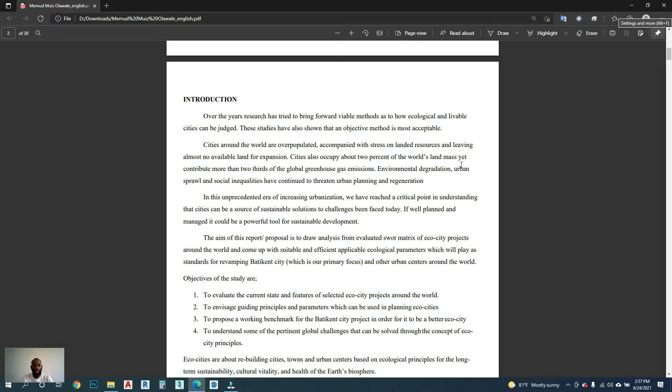The objectives of this study are: to evaluate the current state and features of selected eco-city projects around the world; to envisage guiding principles and parameters which can be used in planning eco-cities; to propose a working benchmark for the Batikent city project in order for it to be a better eco-city; and to understand some of the pertinent global challenges that can be solved through the concept of eco-city principles.

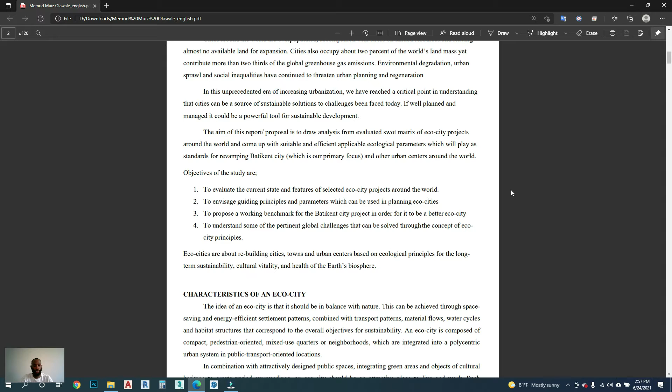Eco-cities are about rebuilding cities, towns, and urban centers based on ecological principles for long-term sustainability, cultural vitality, and health of the Earth's biosphere.

Characteristics of an eco-city: the idea is that it should be in balance with nature. This can be achieved through space-saving, energy-efficient settlement combined with transport patterns, material flows, water cycles, and habitat structures that correspond to the overall objective of sustainability.

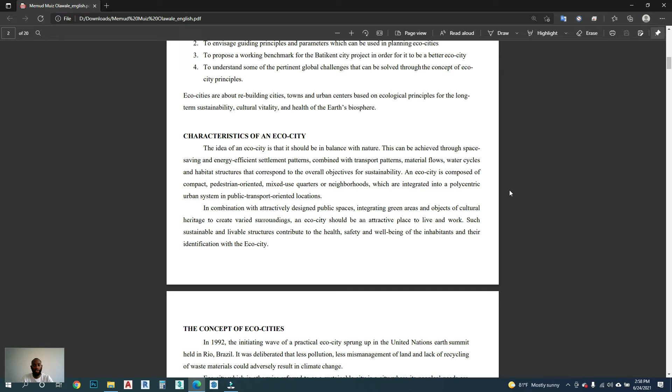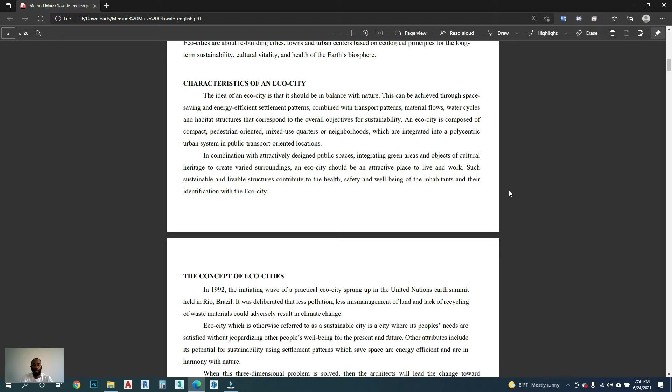In combination with attractively designed public space, integrating green areas and objects of cultural heritage to create varied surroundings, an eco-city should be an attractive place to live and work. Such sustainable and livable structure contributes to the health, safety, and well-being of the inhabitants and their identification with the eco-city.

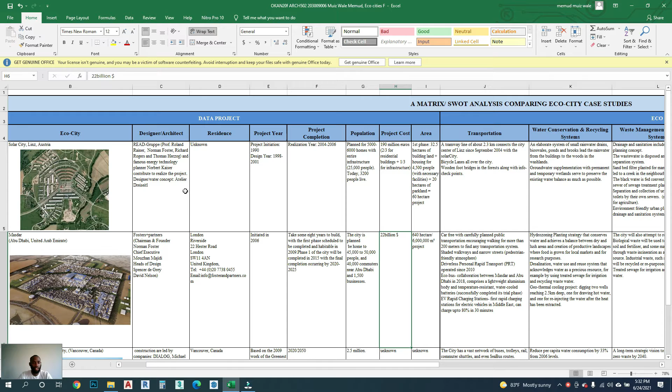This is the matrix and SWOT analysis table. The first case study is Solar City in Linz, Austria, designed by Professor Roland Rainer, Norman Foster, Richard Rogers, and Thomas Herzog. The residence count is unknown. It was initiated in 1990 and completed between 2004 and 2006, planned to cater for 25,000 people, with a project cost of 190 million euros.

The area of this city is 32.5 hectares of building land plus housing for 4,500 people with necessary facilities, and 20 hectares of parkland, equating to 60 hectares of land for the project. For transportation, a tramway line of about 2.3 kilometers has connected the city center of Linz with Solar City since September 2004. There are bicycle lanes all over the city, wooden bridges in the forest, along with information checkpoints.

The water conservation: an elaborate system of small rainwater drains, bioswales, ponds, and brooks lead the rainwater from the building to the woods in the washland. The drainage and sanitation are included in the overall planning concept; the waste water is disposed and incurred in the separation

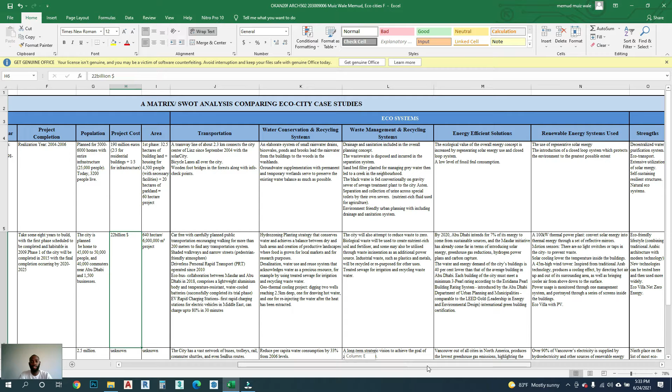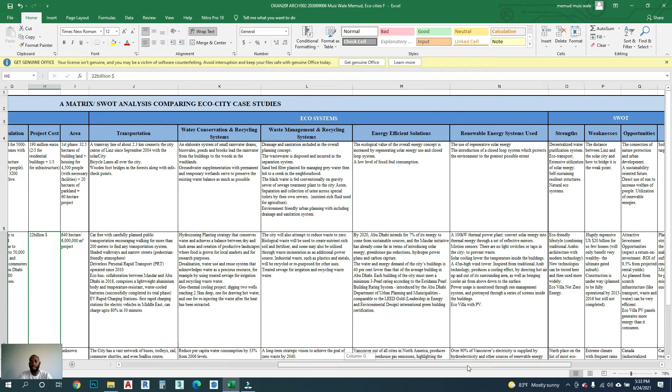system. For the energy efficient solution, the ecological value of the overall energy concept is increased by regenerative solar energy use and a closed loop system, with a low level of fossil fuel consumption. For the renewable energy system used, the use of regenerative solar energy and the introduction of a closed loop system, which protects the environment to the greatest possible extent.

For the SWOT analysis, the strengths: the decentralized water purification system, eco transport, extensive utilization of solar energy, self-sustaining resilient structure, natural ecosystem. For the weakness, the distance between Linz and the solar city and how to bridge it is a weak point. For opportunities, the connection of nature protection and urban development, a sustainability-oriented future, direct use of sun to increase welfare of people, utilization of renewable energies. For the threats, soil was not targeted and neglected.

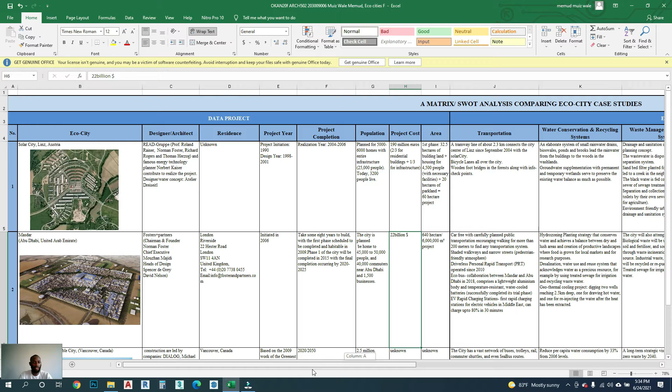For Masdar, Abu Dhabi in UAE, it was designed by Foster and Partners, located in London Riverside. It was initiated in 2006. Part of the project, which is phase one, was completed, and the other part of the project will be completed between 2020 and 2025. It was planned to home about 45,000 to 50,000 people and 40,000 commuters near Abu Dhabi and 1,500 businesses. The project cost about $22 billion. The area of the project is 640 hectares.

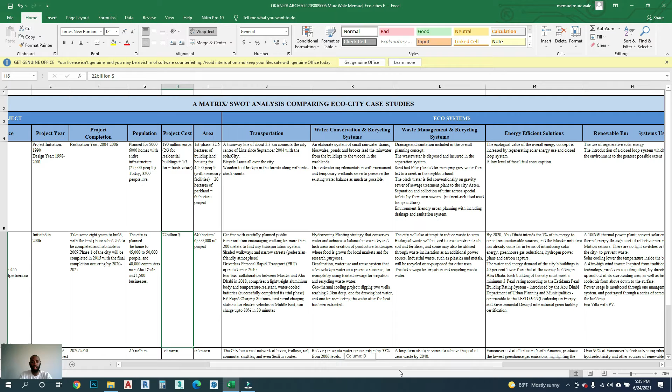For the transportation, car-free with carefully planned public transportation, encouraging walking for more than 200 meters to find any transportation system, shaded walkways and narrow streets, driverless PRT, EcoBus collaboration between Masdar and Abu Dhabi in 2018 comprises a lightweight aluminum body and temperature-resistant water-cooled batteries. For the water conservation and recycling system, a hydrozoning planting strategy that conserves water and achieves a balance between the dry and lush area, and creation of a productive landscape where food is grown for the local market and for research purposes.

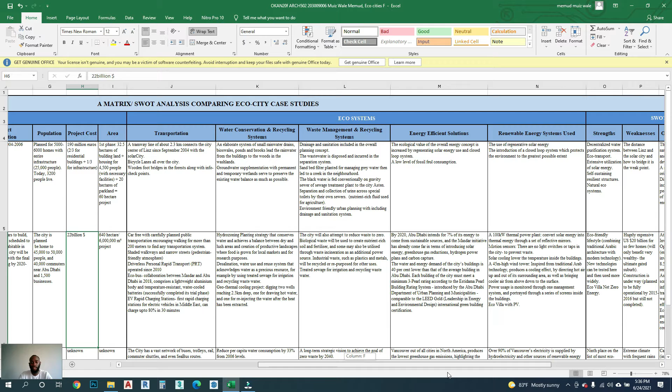For the waste management and recycling system, the city will also attempt to reduce waste to zero. Biological waste will be used to create nutrient-rich soil and fertilizers, and some may be used through waste incineration as an additional power source. For energy efficient solutions, by 2020, Abu Dhabi intends for 7% of its energy to come from sustainable sources, and the Masdar initiative has already come far in terms of introducing solar energy, greenhouse gas reduction, hydrogen power plants, and carbon capture. This is not addressed yet because of the COVID-19 outbreak.

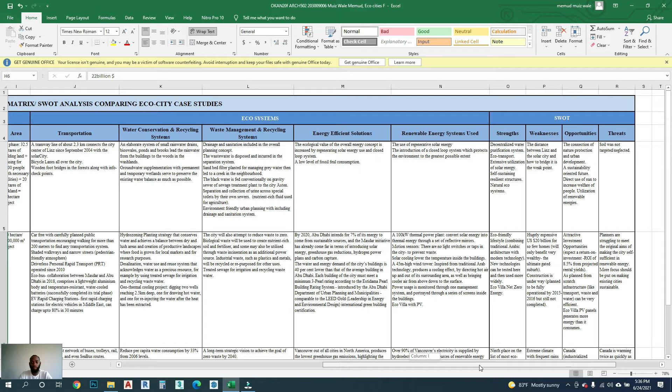For the renewable energy system used, a 100 kilowatt thermal power plant converts solar energy into thermal energy through a set of reflective mirrors, motion sensors. There are no light switches or taps in the city to prevent waste. The SWOT analysis of this eco-city: eco-friendly lifestyle combining traditional Arabic architecture and modern technology. New technology can be tested here and then used more widely. Eco villa net zero energy.

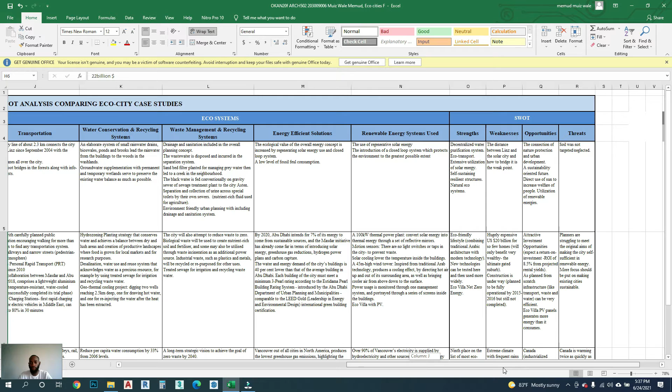For the weaknesses, it is expensive; the cost of the project is about $20 billion, and it benefited only a few people because of the few homes that were created with this huge amount of money. The opportunity: attractive investment opportunity, expect a return on investment of 8.5% for projected rental yield. The threat: planners are struggling to meet the original aim of making the city self-sufficient in renewable energy. More focus should be put on making the existing cities sustainable.

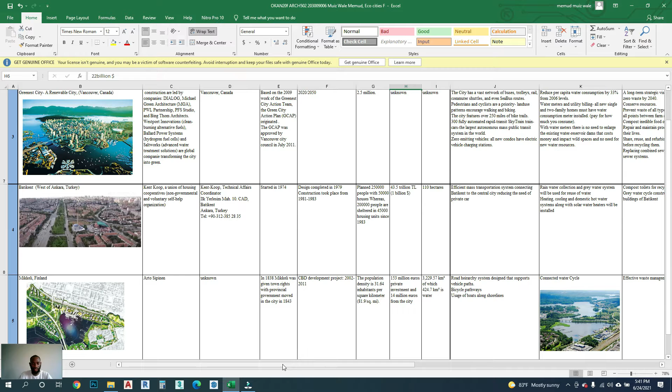The Batikent city, which is the city I'll be working on, that I'll be improving on, was initiated by Kent Koop, located in Ankara, Turkey. The project started in 1974. It was completed in 1979. It was planned to cater for 250,000 people. Also, the cost of the project was 43.5 trillion lira, which is $1 billion as at that time.

The transportation: efficient mass transportation system connecting Batikent to the central city, reducing need for private cars. The water conservation: rainwater collection and grey water system will be used to reuse water. Heating, cooling, and domestic hot water systems along with solar water heaters will be installed. For the waste management, compost toilets for recycling waste, grey water cycle constructed throughout the buildings of Batikent.

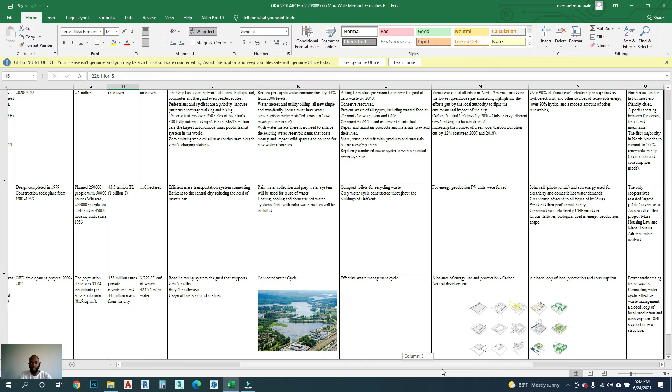For the energy efficient solutions, for energy production, PV units were forced. Renewable energy system used: solar cell, photovoltaic, and sun energy used for electricity and domestic hot water demand. Greenhouses adjacent to all types of buildings, wind and geothermal energy. The SWOT for the strength, weakness, opportunity and threat for this Batikent city. The strength: the only cooperative assisted largest public housing area.

As a result of this project, mass housing law and mass housing administration evolved. Weakness: the nursery center and entertainment structure in the neighborhood center did not develop, inoperable, bizarre. For the opportunity, a social cooperative, strategic, holistic, and endless planning process, the involvement of administration. For the threat, changes in zoning and the neighborhood centers are required. The bicycle transportation route envisioned by the Batikent zoning plan should be recognized.

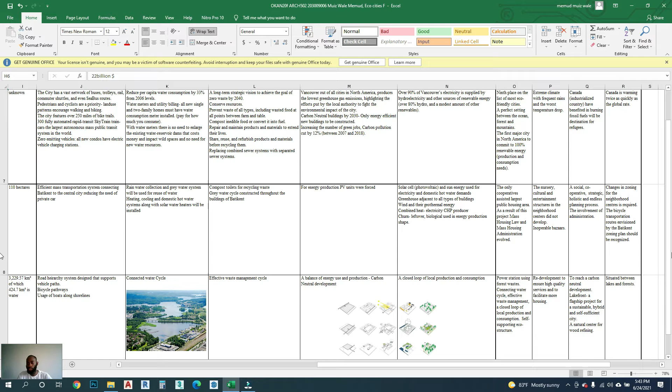Batikent sits on about 1.5 million square meters, and for the purpose of this course, I will be working on one third of this landmass. Holistically, the eco-city strategies that I will put in place here will be extended towards the other part of the city upon implementation. So when designing, I put into consideration the locations of the supporting facilities to be on the central side, so that it will be easy to cater for other parts of the site.

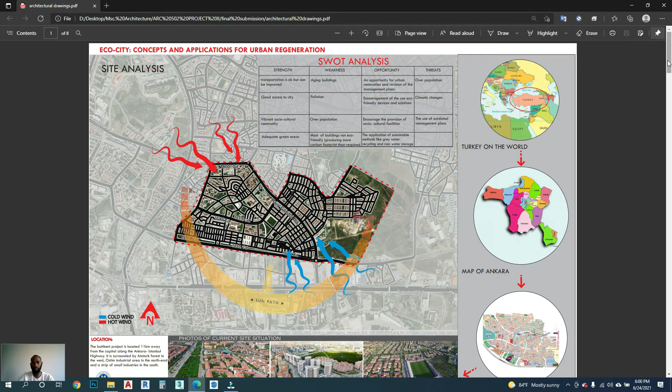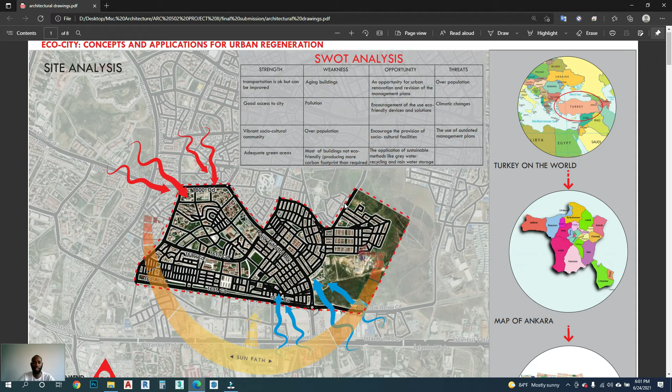So for the SWOT analysis, the strength of this site: transportation is okay, but it can be improved upon. Good access to the city, vibrant socio-cultural community, adequate green area. For the weakness: aging buildings, pollution, overpopulation. Most of the buildings are not eco-friendly. Opportunities are urban renovation and revision of the management plan, encouragement of the use of eco-friendly devices and solutions, encouraging the provision of social cultural facilities, the application of sustainable methods like grey water recycling and rainwater storage. For the threat: overpopulation, climate changes, and the use of outdated management plans.

This is the conceptual development. I have the legend to the right side of the sheet. Note, this particular project sits on 1,502,520 square meters. It is set to promote sustainability, renewable energy, and healthy living to all the residents and commuters. Neighborhoods will have distinct buildings and design elements. Streets will be laid out to optimize shading and parks to assist in ventilating the city. Eco transport system to efficiently connect surrounding areas.

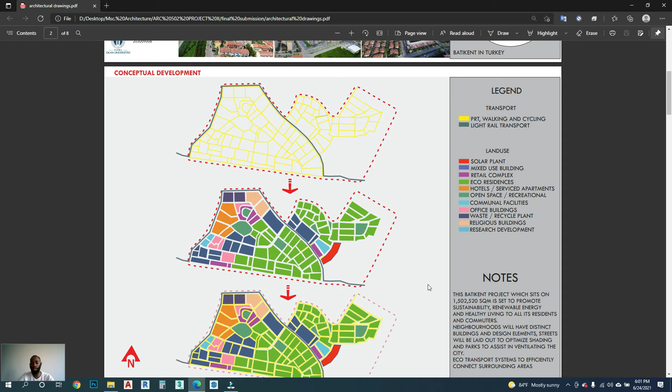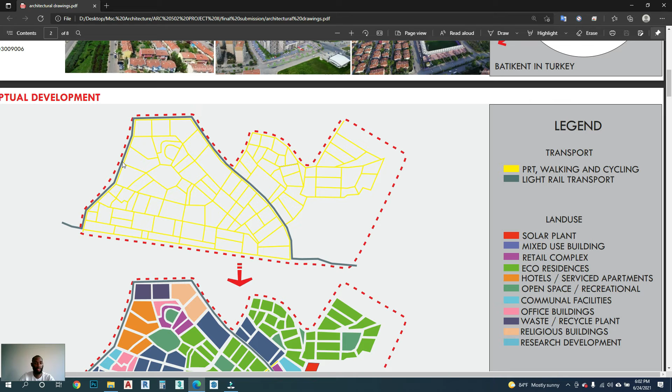So this first drawing here, I have the yellow line which indicates the PRT, the walking and cycling path. For the light rail system, that's the blue line, gray line. So the other part of the city will be on this side. So holistically, the cycling, the light rail transport, the PRT, the walking, work as a whole. So the path ends where I ended the 1/3 of the site for the purpose of this design.

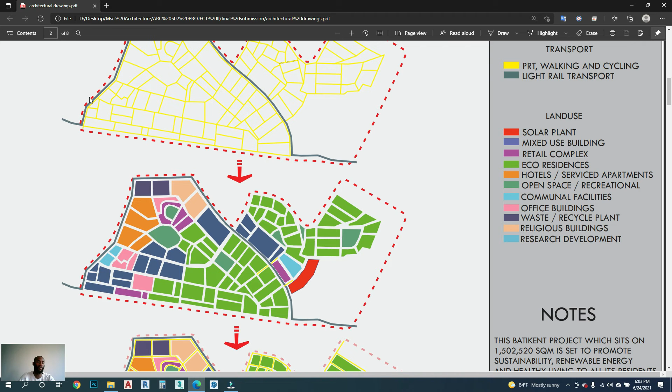The land use: I have the solar plants, which is the red portion here. I have the mixed-use building, the retail complex, the eco residence, which are the green colors here. I have the hotel, service apartment, the open space, recreation, the communal facilities, the office buildings, waste and recycle plants. It is located on the edge of this portion, so it can benefit other portions also holistically. I have the religious building, I have the research development. So this merges both the transport path and the land use in the third drawing.

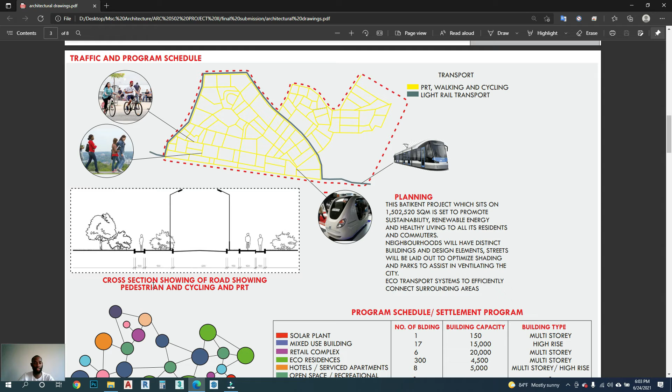Traffic and program schedule. This is a cross section showing road, pedestrian, and cycling and PRT. Also, the program schedule and settlement program. I have the solar plant. The number of solar plants I'll be having on this part will be 1. The building capacity is 150. The building type is multi-story. I have the mixed building, which will be 17 buildings in all. Also, I propose a mixed building, which I'll be discussing at the end of this presentation.

I have the retail complex. The number of retail complexes will be 6. The eco residence will be 300, multi-story. I have the hotel and service apartment. The capacity will be 5,000, multi-story and high-rise. I have the communal facility, the office building, which should be 7. The building capacity will be 6,000, multi-story also. I have the waste and recycle plant. I have the religious building and research development. This is a bubble diagram showing the functional relationship between the land uses.

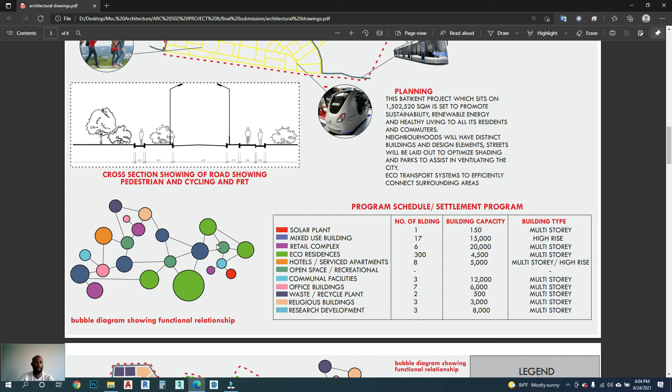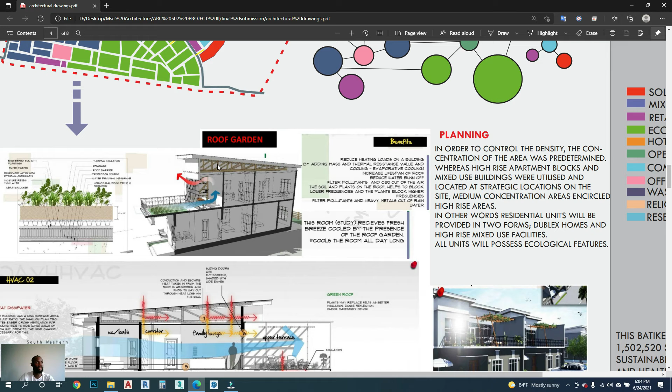For this, the bubble diagram showing the functional relationship. Also, for the eco residence, these are the strategies that will be in place for the eco residence: the roof garden, the HVAC system, the application of the eco city principles. I have the park and squares, the eco mixed use building.

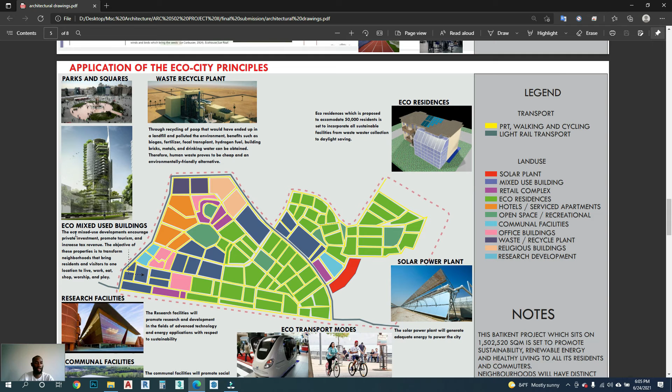The eco mixed use development encourages private investment, promotes tourism, and increases tax revenue. The objective of this property is to transform neighborhoods that bring residents and visitors to one location to live, work, eat, shop, worship, and play in one building. So it will reduce the number of times someone has to go out with the vehicle.

So for the waste recycle plants, through recycling of poo that would have ended up in a landfill and polluted the environment, benefits such as biogas, fertilizer, fecal transplants, hydrogen fuel, building bricks, metals, and drinking water can be obtained.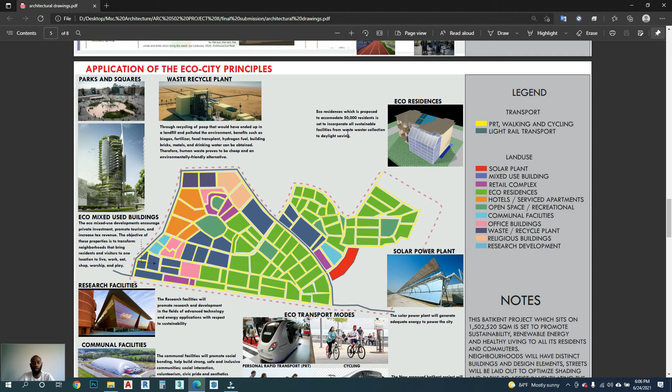The eco residence, which is proposed to accommodate 30,000 residents, is set to incorporate all sustainable facilities from wastewater collection to daylight saving. I have the solar plant. The solar plant will generate adequate energy to power the city. The eco transport modes: the rapid transport, the personal rapid transport, the cycling, the light rail transport, and walking.

The new proposed Batikent project will cater for improved eco transport modes, automated system of electric vehicles, including passenger cars, light rail, cycling, walking, personal rapid transport. For research facility, the research facility will promote research and development in the field of advanced technology and energy application with respect to sustainability.

The communal facility will promote social bonding, help build strong, safe, and inclusive community and environment, social interaction, volunteerism, civic pride, and aesthetics.

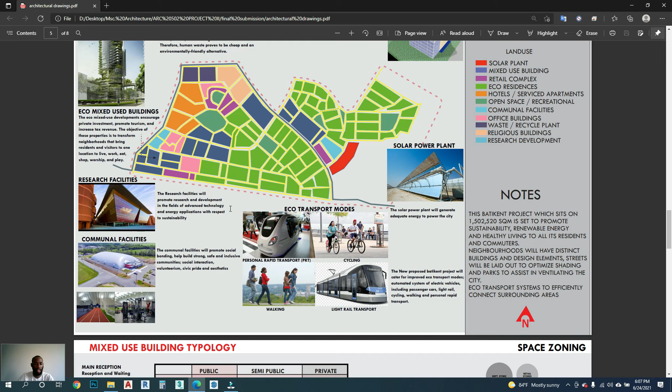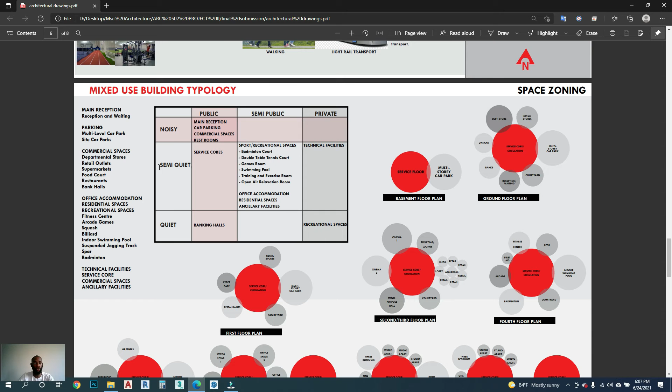So for this sheet, I'll be discussing the plan I have made for the mixed-use building. I am proposing a mixed-use building for the Eco City. These are the list of spaces. So this is a site plan. I catered for just 98 cars on the site. The rest of the cars will be in the multi-story car parks, so that I'll be able to reduce the size of hardscaping I will have on the site. So I would encourage more green areas on the site. I have the water park also to help cool the building using an evaporative cooling system.

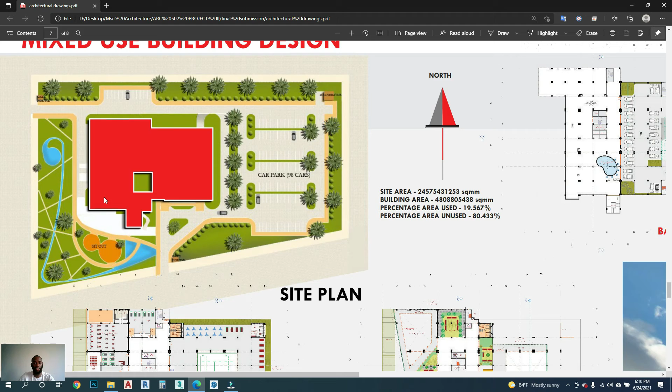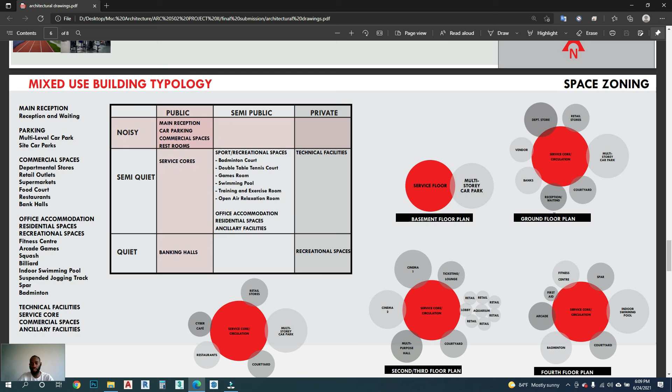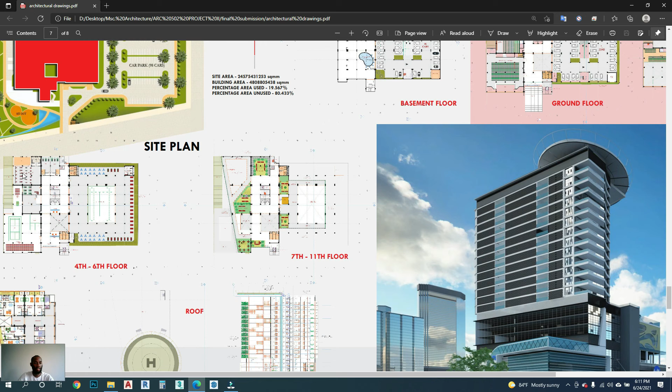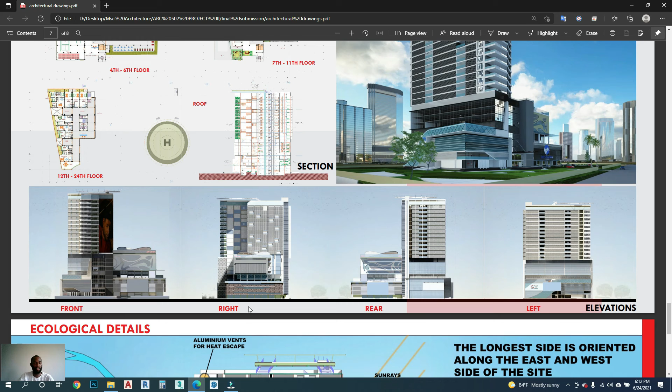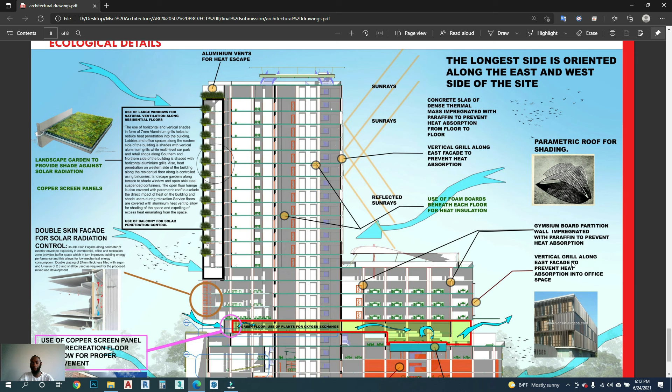The section indicating the sectional part of the building. I have the front elevation, the right elevation, the rear elevation, and left elevation. The ecological details of this design. So I catered for a parametric roof for shading, gypsum board partition walls impregnated with paraffin to prevent heat absorption, vertical grills along east facade to prevent heat absorption into the office, because the office is located on this part of the building. Indoor pool for evaporative cooling. I have the double skin facade for solar radiation control, and the green roof.

The recommendation and conclusion part of the project. When the hypothetical development meets current needs without compromising the ability of future generations to meet their needs, we classify the development as sustainable development. In this case, sustainable urbanization must provide the following conditions. 1. The natural habitat must be protected. The demand for housing caused by population growth must be addressed by protecting green spaces, vertical structures instead of horizontal structures. So we should encourage more mixed-use high-rise buildings. There must be protection for water sources, not excessively encourage the use of motorcycles.

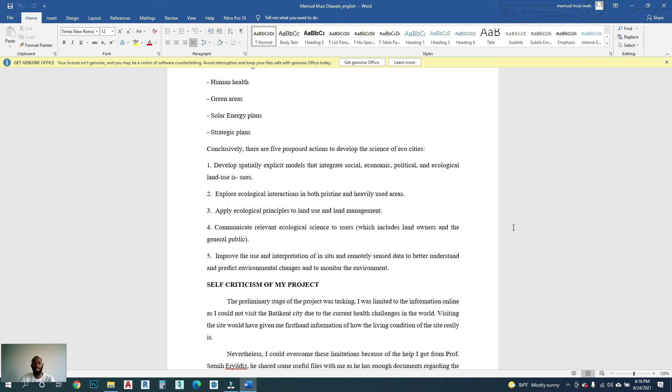Conclusively, there are 5 proposed actions to develop the science of eco-cities. 1. Develop a spatially explicit model that integrates social, economic, political, and ecological land usage. Explore ecological interactions in both pristine and heavily used areas. Apply ecological principles to land use and land management. Communicate relevant ecological science to users, which includes landowners and the general public. 5th, improve the use and interpretation of in situ and remotely sensed data to better understand and predict environmental changes and to monitor the environment.

Self-criticism of my project. The preliminary stages of this project were tasking. I was limited to the information online as I could not visit Batikent city due to the current health challenges in the world. Visiting the site would have given me first-hand information of how the living condition of the site really is. Nevertheless, I could overcome these limitations because of the help I got from Professor Semih Eryildiz, because he designed a project of Batikent City. He shared some useful files with me as he has enough documents regarding the current situation of the city. It was an interesting topic. I now have a holistic idea of how an Eco City should be developed.